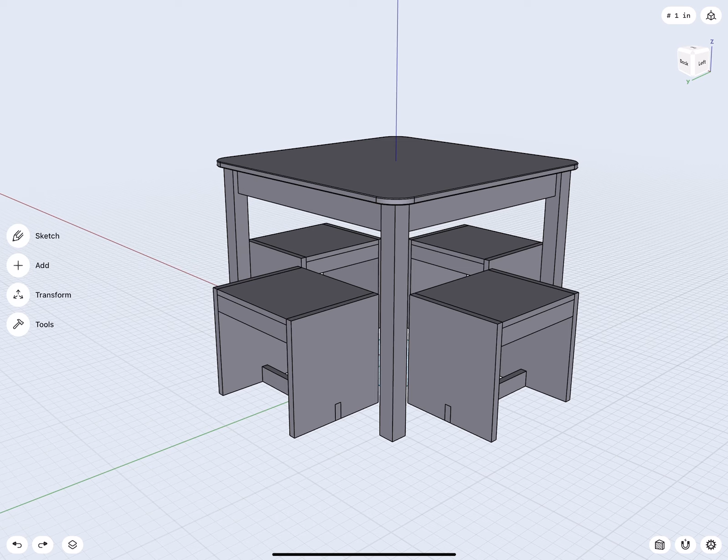Hello everybody, and welcome to this tutorial on how to model a toddler's table and bench set out of only one very basic square sketch, then doing the rest via Shapr3D's fantastic direct modeling tools.

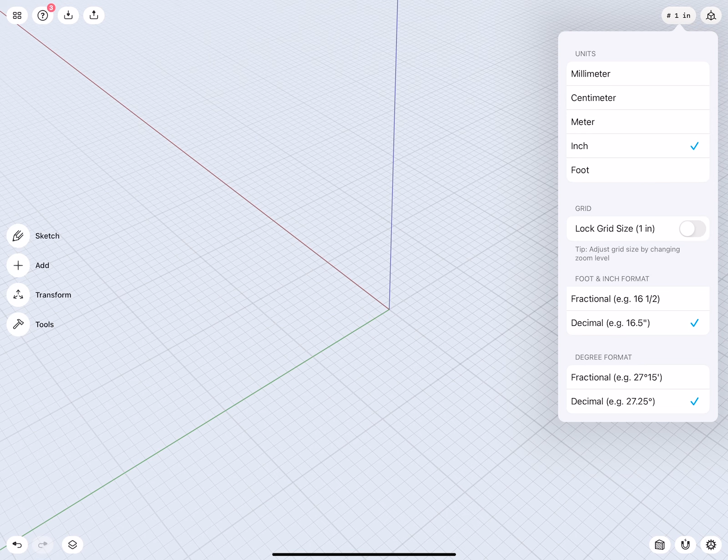We want to set units to inches. We will go into a top view, center the view, and make sure all our grid snapping elements are turned on. As I said, we will create everything just out of one basic square sketch.

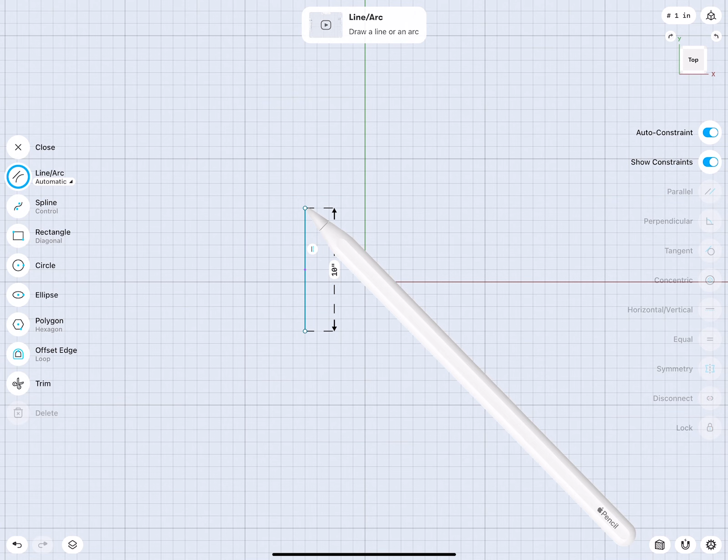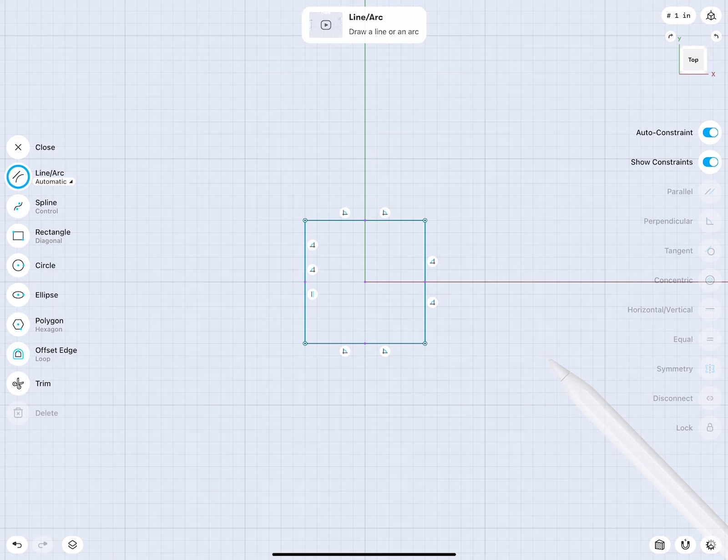So let's draw it. Somewhere here I draw my sketch, 10 inches by 10 inches. The square, however, I would like to be perfectly aligned, so I just move this down 1 inch. You see, drawing along the grids really makes a lot of sense - it makes it easy to perfectly center this square right in our design.

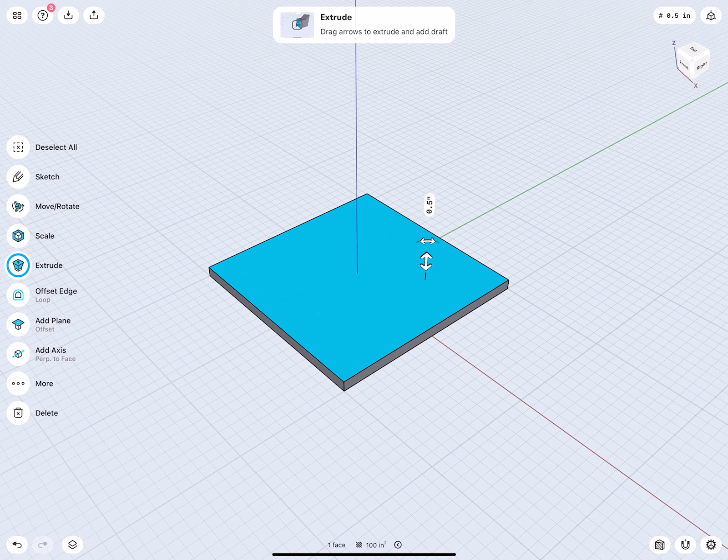Very good, let's create our first object. With the pencil, select the sketch, and then we extrude this one up by 0.5 inches. Double tap, and move this to somewhere - I don't know yet the height, we'll figure this out later. Very good, there's our top seating surface.

Now we have to design the sides, and as I said, just one sketch. Because now we have a cube, from this cube we can start modeling everything else. So let's make a copy.

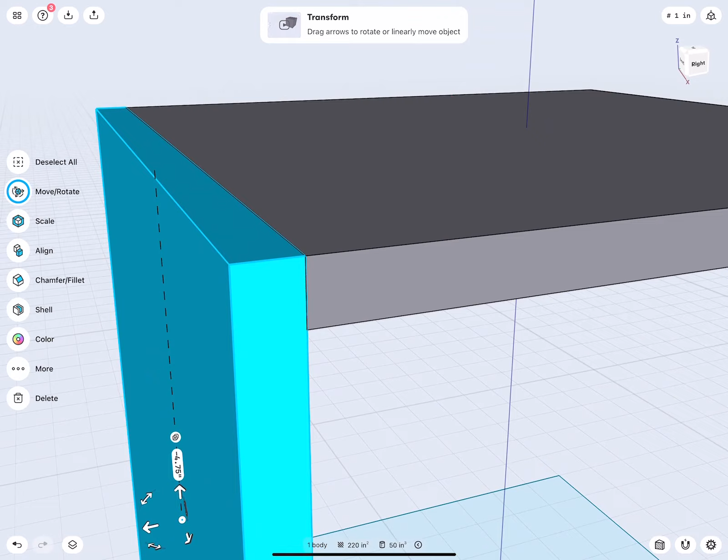So I clicked on copy, then we rotate this 90 degrees, turn copy off, move this over and move this down. Very nice, you see when the grid units work out, everything perfectly lines up.

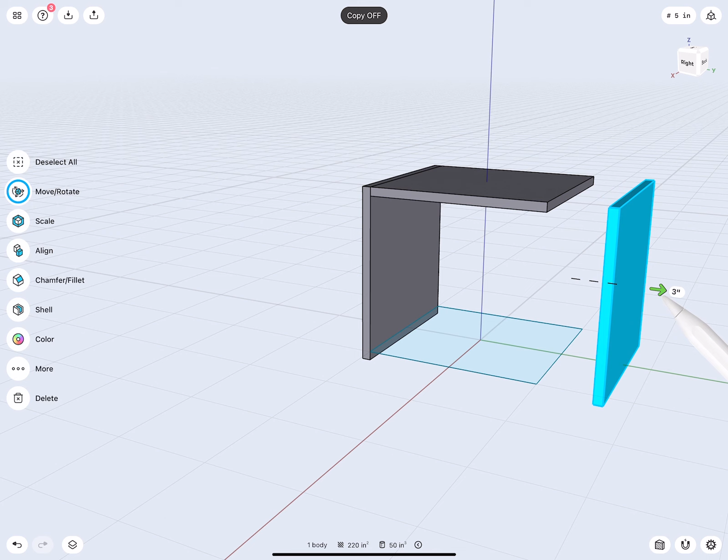I will double tap, click on make a copy, and then move this one over 10.5 inches. I turn this off and move this over to here, because I would like to show you something too.

So we could also, if we want to position this, there are two ways. The whole object is selected, then I can go to more, translate, and then I say, hey, this corner, snap to that corner. Perfect, cool, so nice.

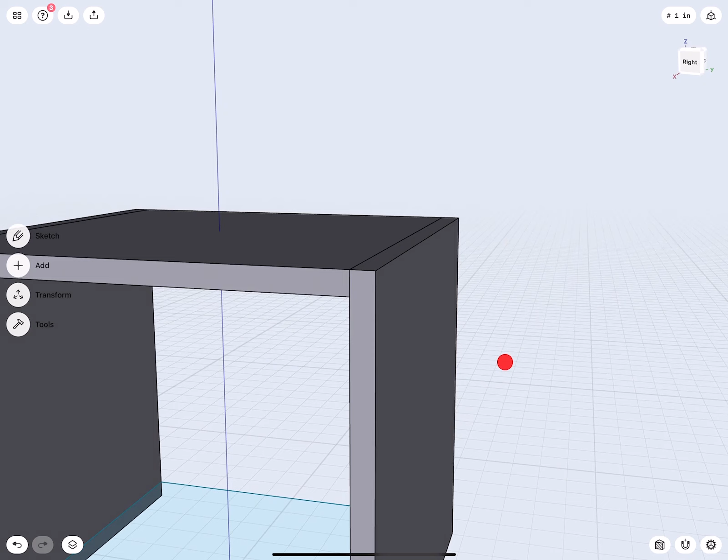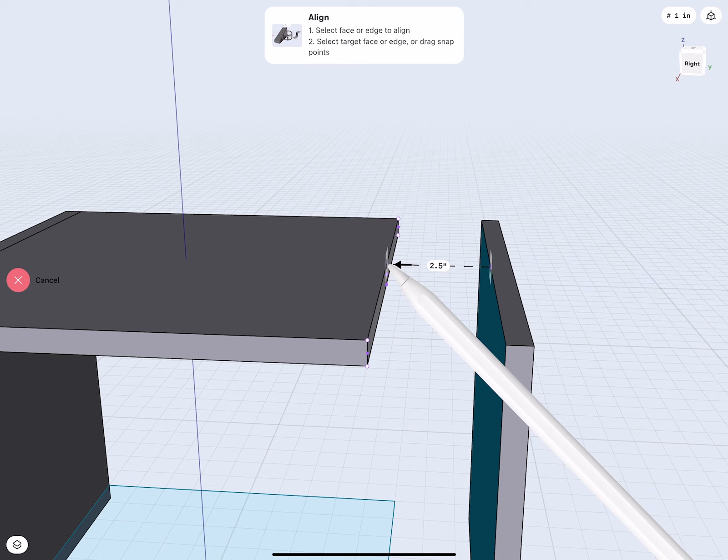Or I select the whole object, and then select the Align command. I would like to use this interface and snap here to this interface there, the top point there. Let's click cancel, and we'll zoom in a little bit more so you can better see what I'm doing. Select this face, then I go to align, and you see there's the corner point and the midpoint.

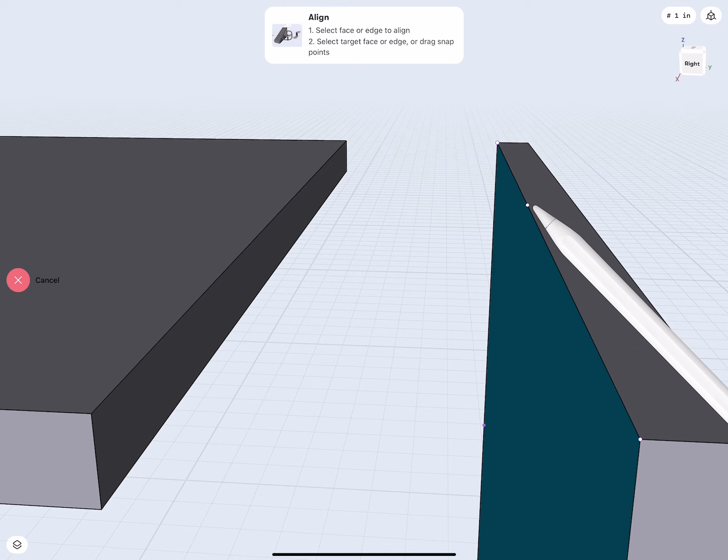So from the midpoint, I click more a little bit on the left side - if I click, sometimes you can actually rotate them. Then here you see how the target now rotates based on what face I'm on. And I want to align it to the midpoint up there. Ta-da! Super easy, done, very good.

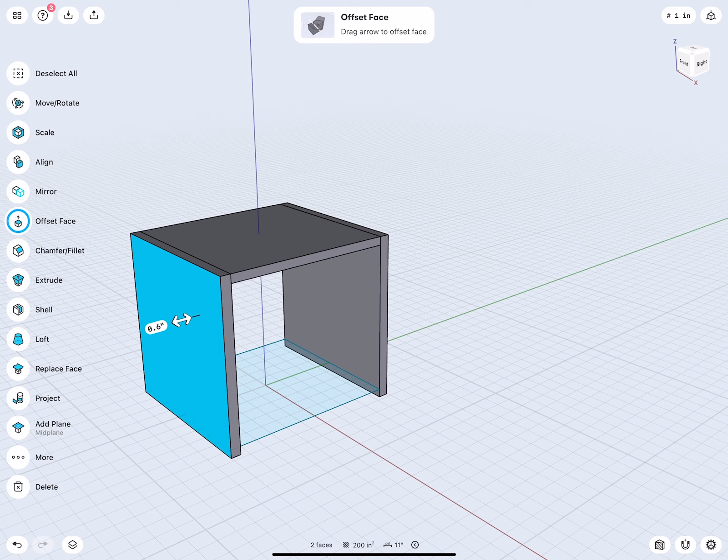Now, these two elements have to be actually not half an inch, but if I select the two faces outside, click on this, then I could actually enter a value - by 0.1, for example. Now it tells me each one is now 0.6 inch. If I select both faces again and then drag, then I get also a readout. Now with the readout, after I dragged, I can actually then type in the actual value I wanted to offset to.

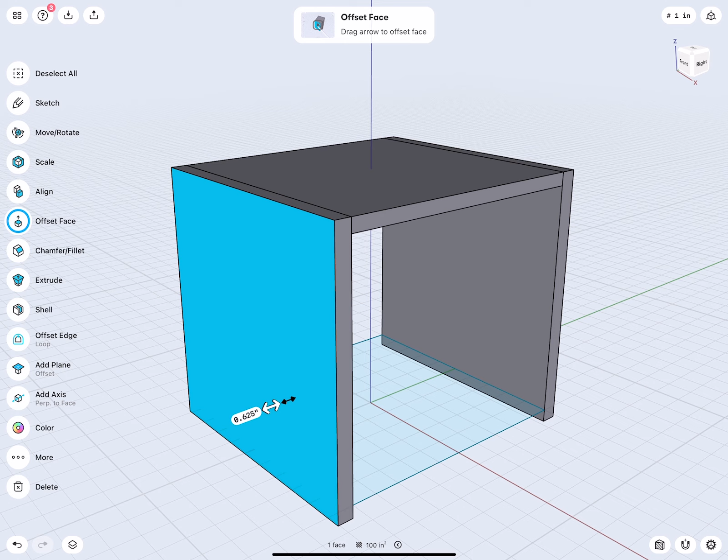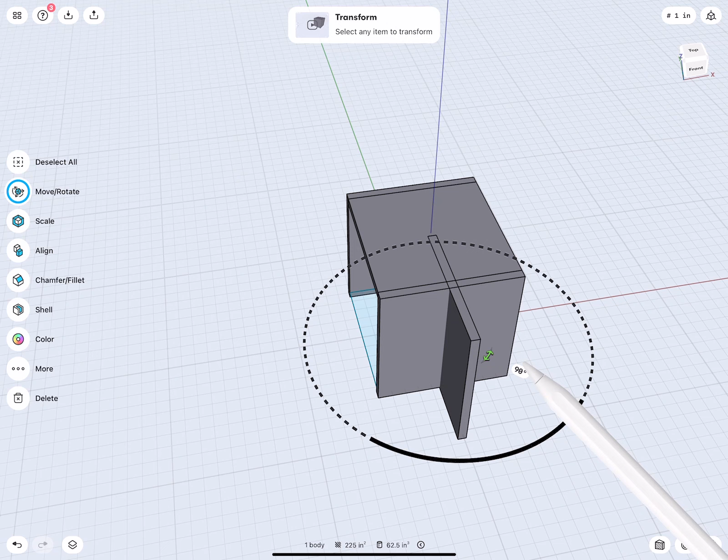Cool, very nice. So the whole thing needs a little bit more stability, so in the front and the back I need a small crossbar, the same at the bottom. We can use this one, make a copy, then I rotate this 90 degrees, turn copy off, move this to maybe here, a little bit there. Very good.

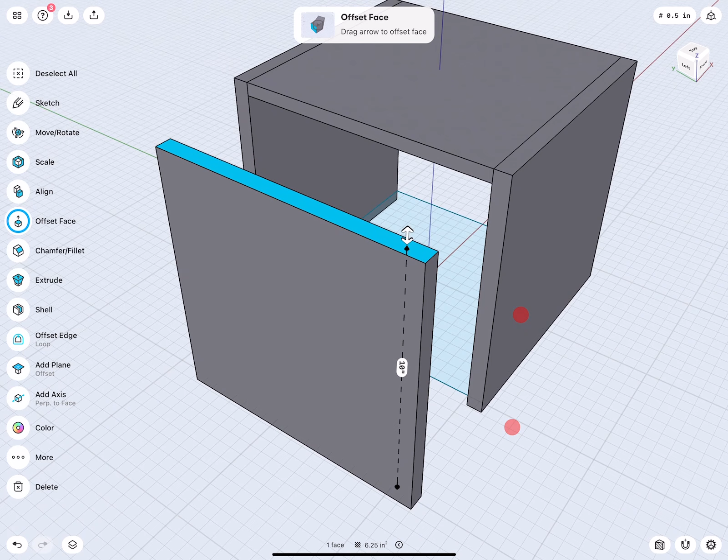So the height has to be 1.5 inches, so I select the top face. You see now it gives me a length readout and the ability to adjust it. Simply tap onto the dimension value, and then there we can set this to 1.5 inches.

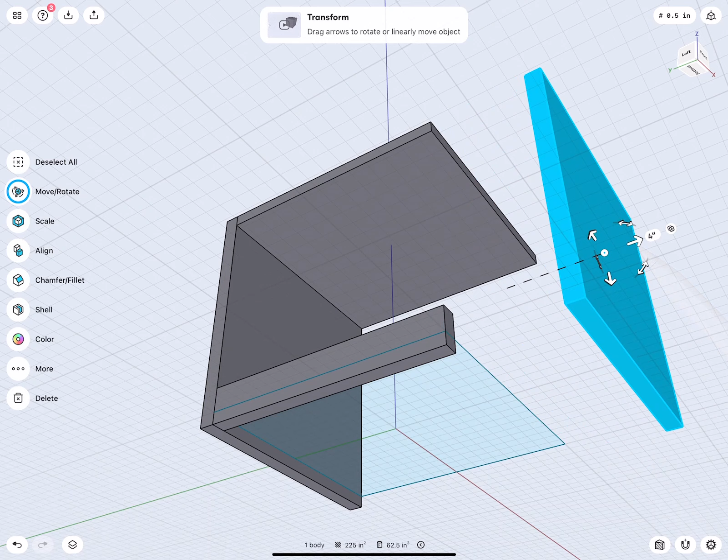Now this corner I would like to match up with there, and we know that's very easy - double tap, more, translate, and then drag from this corner to this corner, and done. When you drag two corners, however, be really careful that you drag them correctly and not a little bit next to it. Now I will move this a little bit on purpose - let's say this is a tick too short.

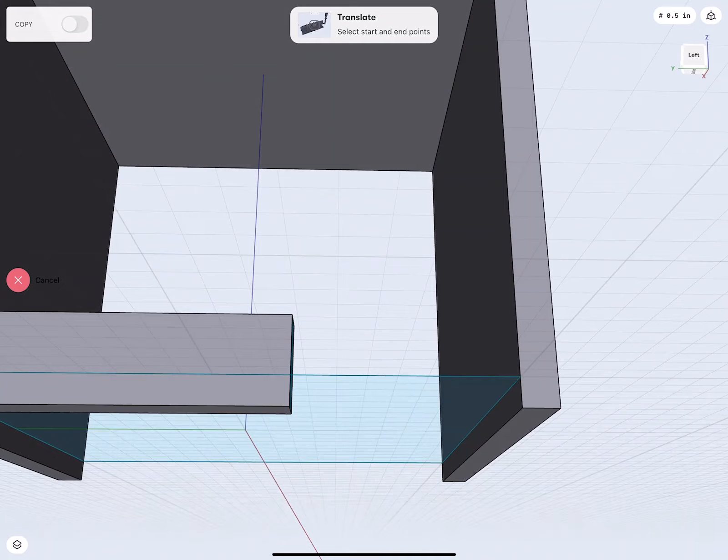How do we do this? Also here, two very simple ways. We can select this face, more, translate, and I go kind of like to this view and then say from here to there, move it.

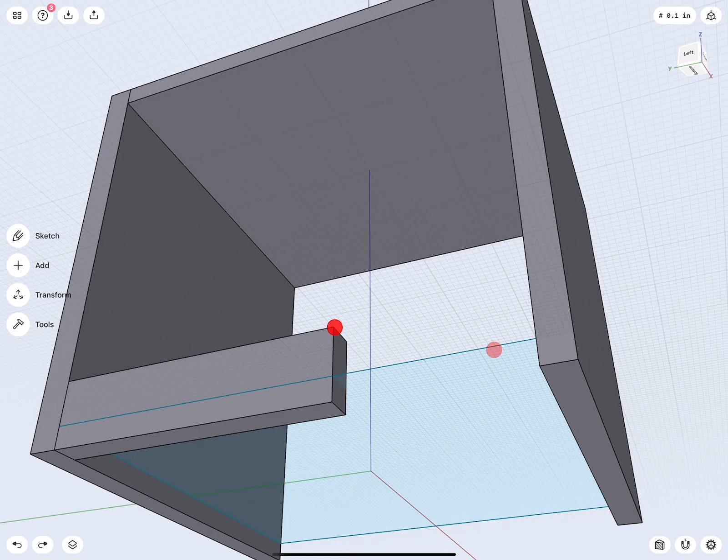Because this is a cube and direct modeling, it can only expand it or offset it along one path or vector - that's the reason why this aligned, even while actually my translate commands were more like a diagonal. The second command is when I selected this face and then this face on the left side, it's called replace face - so essentially now it's being folded onto it. Done, there we are, pretty cool.

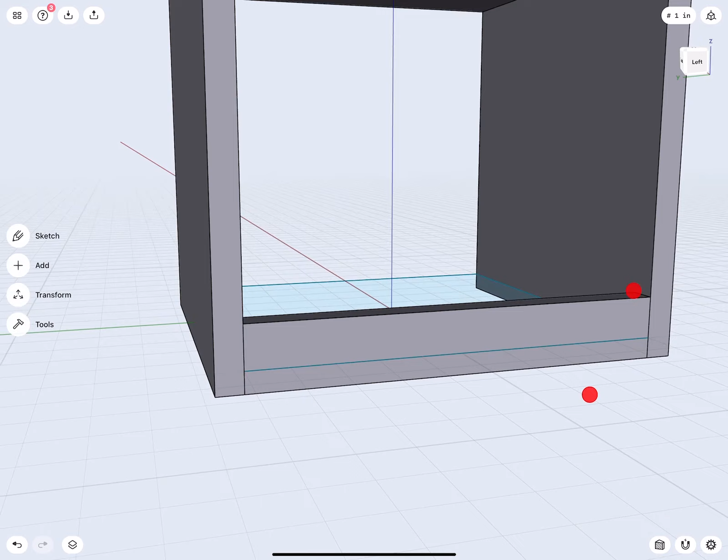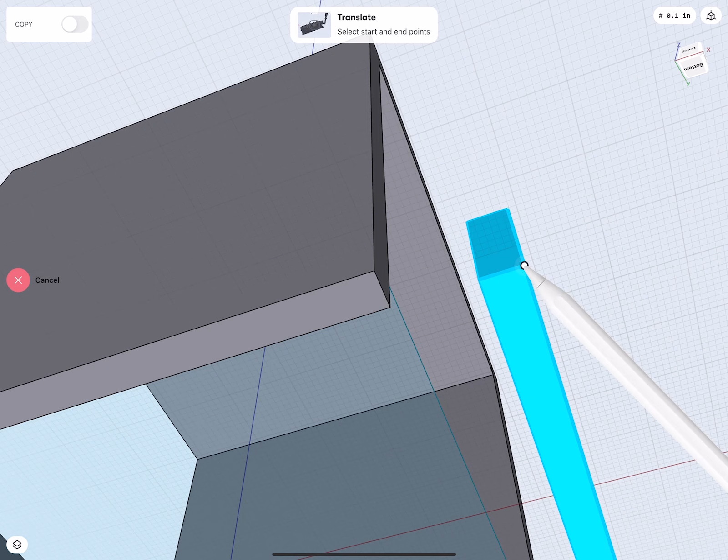Now from here, make a copy, zip, bring it to there. Does this line up? Maybe it can, but here's one tip: as good as the grid stuff always is, if you can, always try to work with the precision tools.

With inches it's not much of a problem, but when you work in millimeters, when you zoom out a little you might not see it, and when you zoom in really close you might see you're a little bit off. So both of those actually have to go up. I can select them again, translate from there, go to this edge. There we are. Very good, easy.

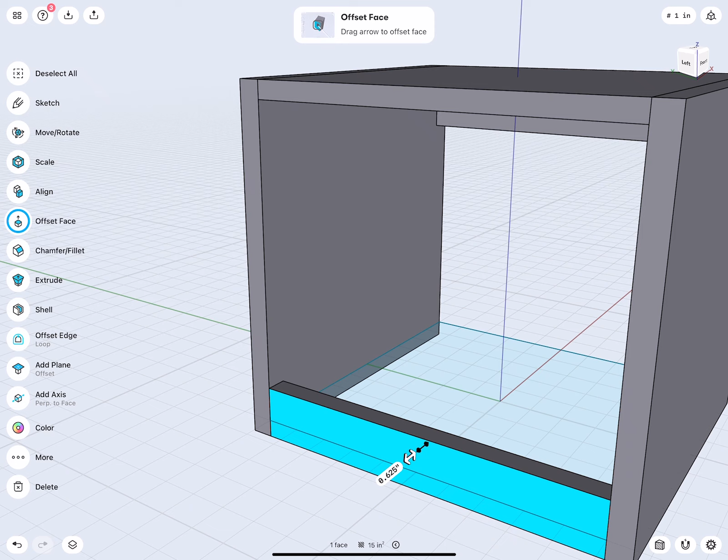Just to show you one more time how this can work when we also use the align command. So this time I will select this, align with there, and flip there, you see, beautiful. Here again, align - from the outside, drag up to the outside, and then we have to flip it. Done, very good.

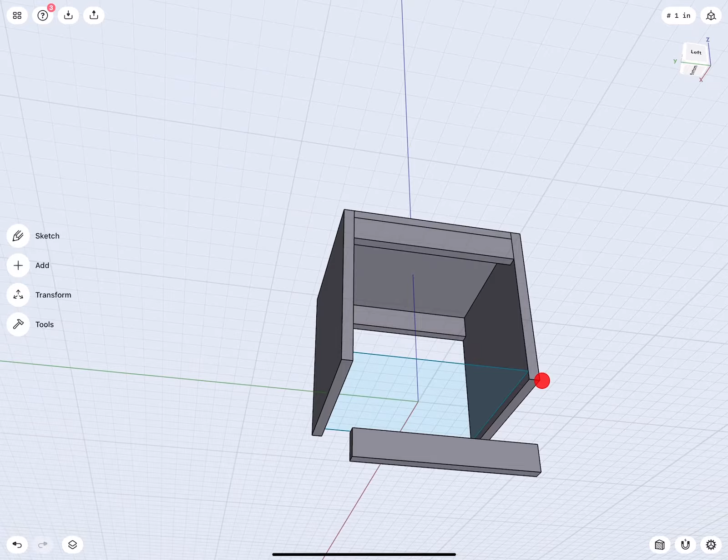Now one of those I need to be right at the center. So I make a copy, there we are. The sketch will be a little bit in my way, so I will hide it. And now I need to figure out a way how I could position this perfectly to there. So this face I see and this face I see, so that makes the align command very easy.

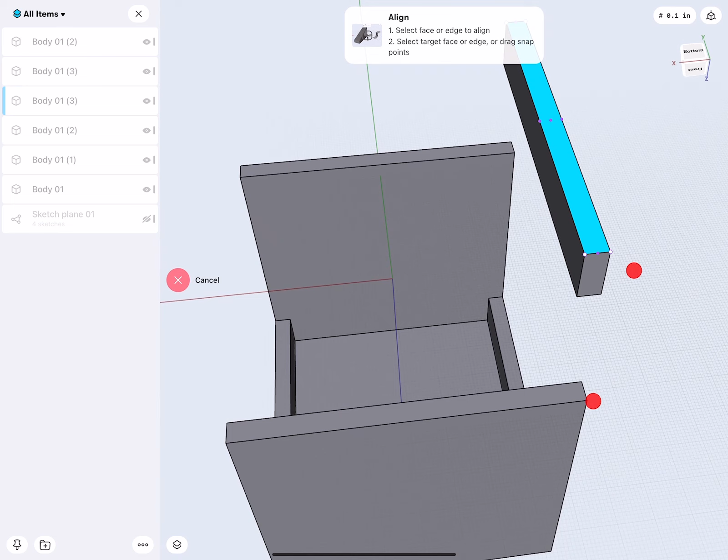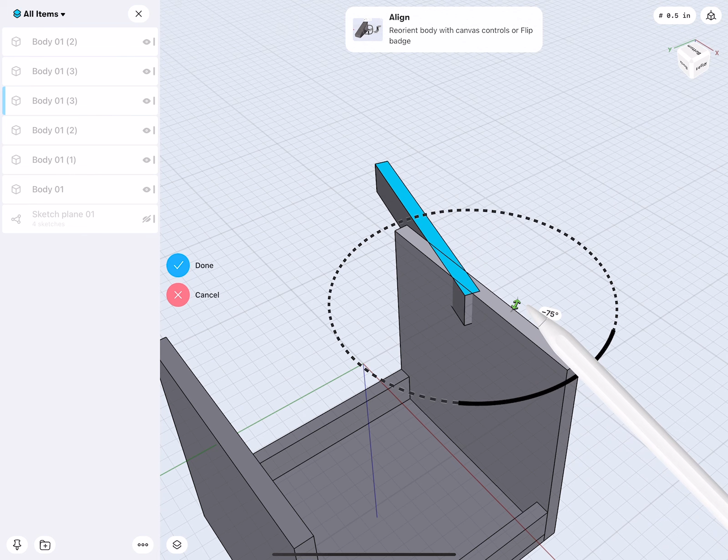So from here on top, go to here on top. Okay, now we flipped it this way, but we can rotate it. And actually the sweet thing is, you see even here when we do these rotations, it gives us more alignment commands. There, parallel, perfect. Cool, there's our bench.

Now I would like to actually have these crossbars at the bottom shine through here, so I want them to stick through. I will select these two faces, then I see which two objects I have there. Very good.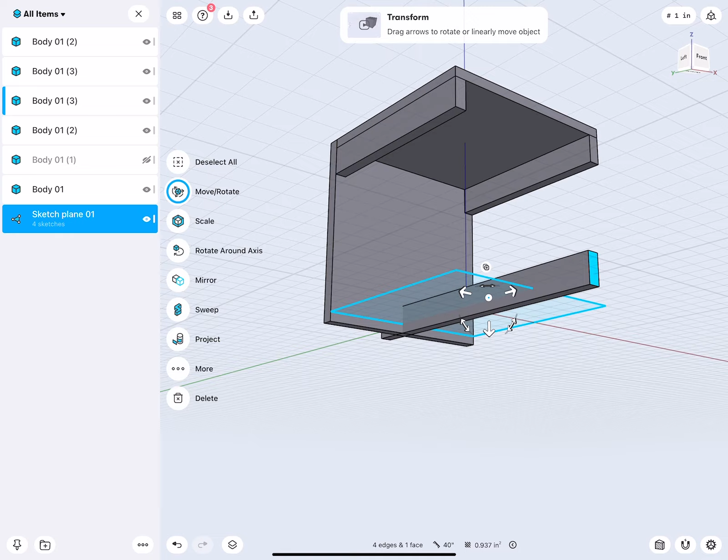That means now this I expand a little bit, same here. The two objects I can show again. So this face to this I will make flush again, same here.

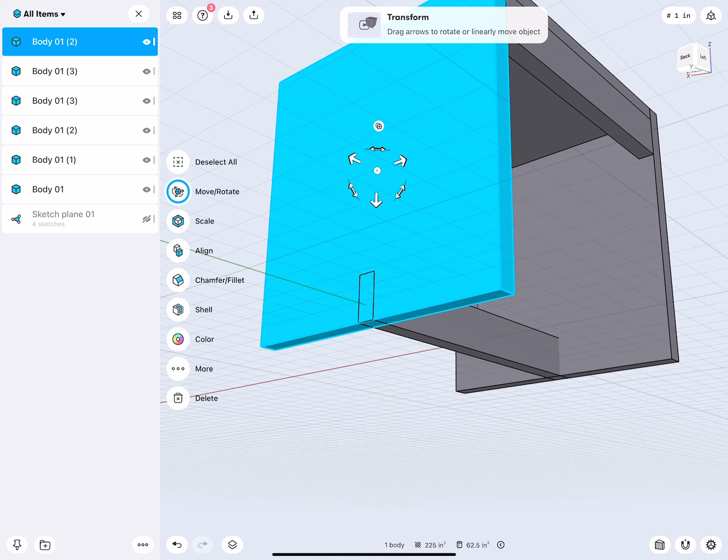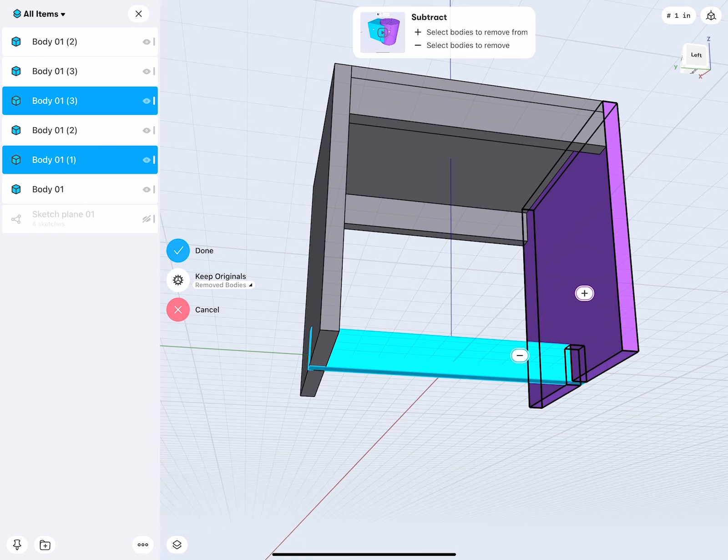There, cool. Now I need to cut out the space, so this object will get this one removed. Important: keep the removed bodies, because what this means is the removed bodies - that's the one with the minus on it, so the cyan one - that is the tool, or the body that will be removed from the magenta one, and we want to keep that one. Cool, there we are. Nice, no?

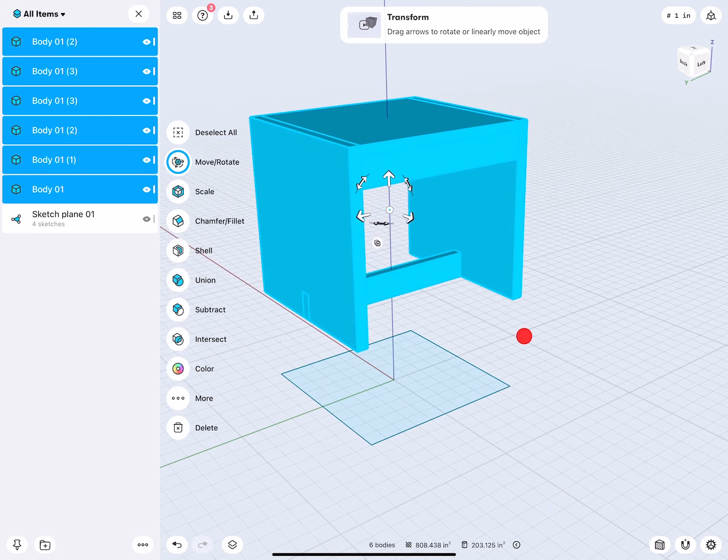Okay, I mentioned before in the first step we just moved it up to somewhere because I honestly don't know where it should be. I will select all this. Now I can go to, for example, the align command. But with so many, align doesn't necessarily work, so I can go with a translate command with all those selected. I could say, good, this corner, go to there. Very good, now you see it snaps perfectly onto it.

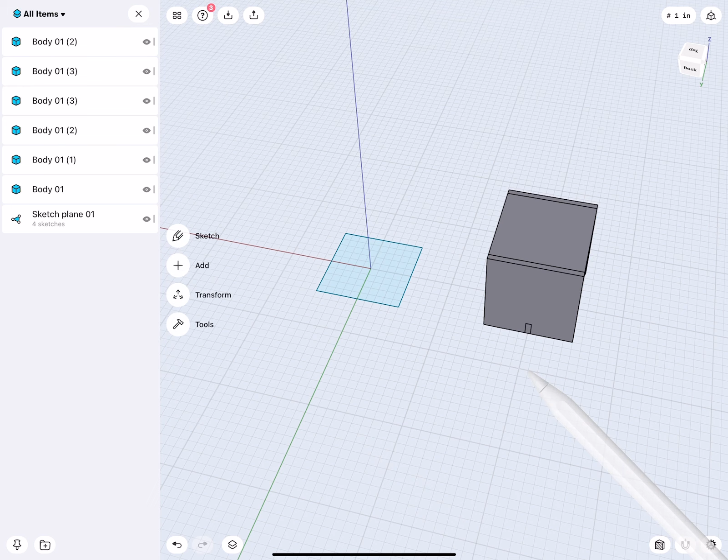So I grounded it and also positioned it correctly centered. Now I moved this nicely back by 20 inches, and all those I put into a new folder. Then select them and new folder, and we call this bench.

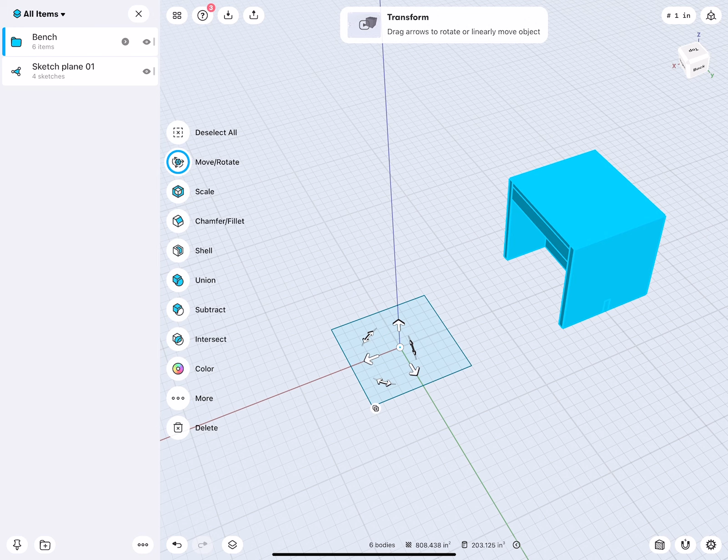With this rectangle, little tip: when we move the 3D widget onto the square center, you see it can snap to there. Turn copy on, have actually this folder selected, and there - it makes then a copy of the folder with all these objects inside. Then it's very easy to show and hide them.

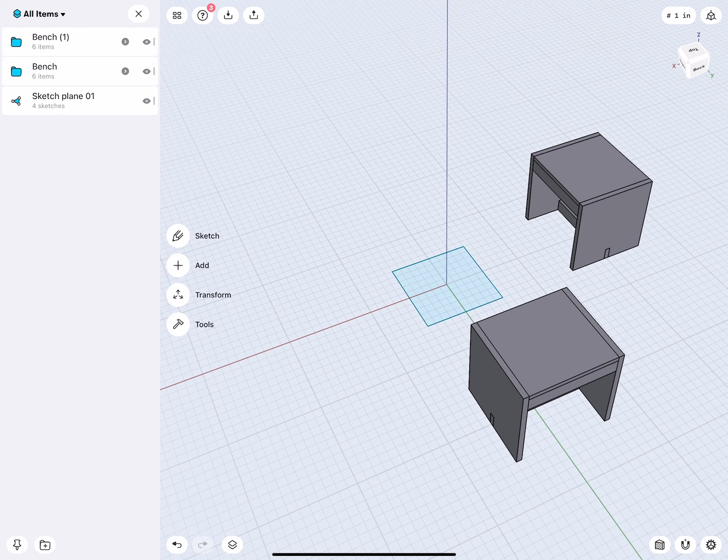Oh, pretty cool. So how do we do now the table? Pretty much very similar steps. And I hope at this point now you see how powerful actually direct modeling is, and we're only using one very basic sketch.

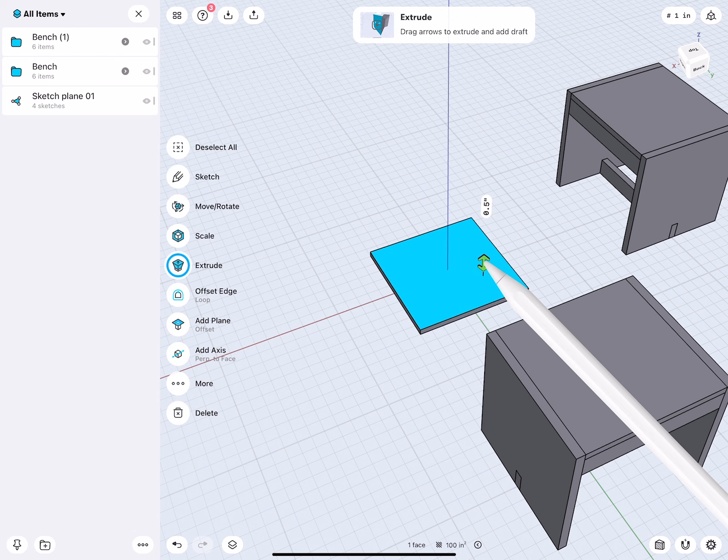Setting up sketches is really great, that can be very useful, but you can also sometimes lose a lot of time when you only focus on a sketch-driven modeling approach. So here we will create a tabletop.

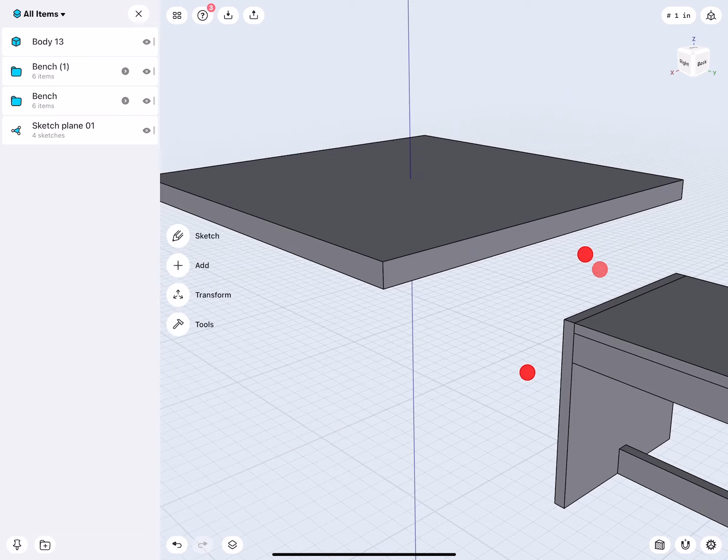1/2 inch extrude, double tap. The whole object we will move up by 19.25 inches. No, this is way too small, I need all 4 edges to expand. That's also cool - like when we have a rectangle, when we select all 4 edges, we can then shrink and expand all at the same time. And this should be 25.

Very good. Now at the end these corners are rounded - we don't do this yet. Let's work actually first on our legs.

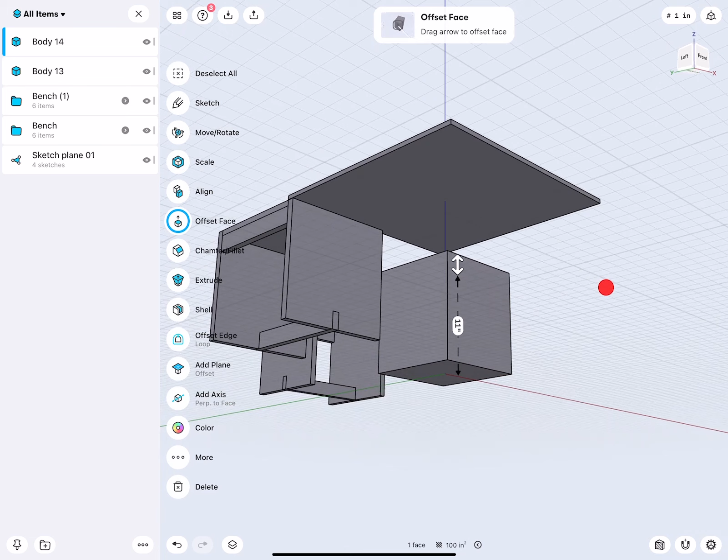Here we extrude this one up, very good, select this face. But you see then actually it stopped selecting this face. So after the extrude, tap somewhere else, tap the face, tap this, and replace face. I knew this was moved up by 19.25 inches, I could have memorized that, but by simply using the replace face command, it does it really precise.

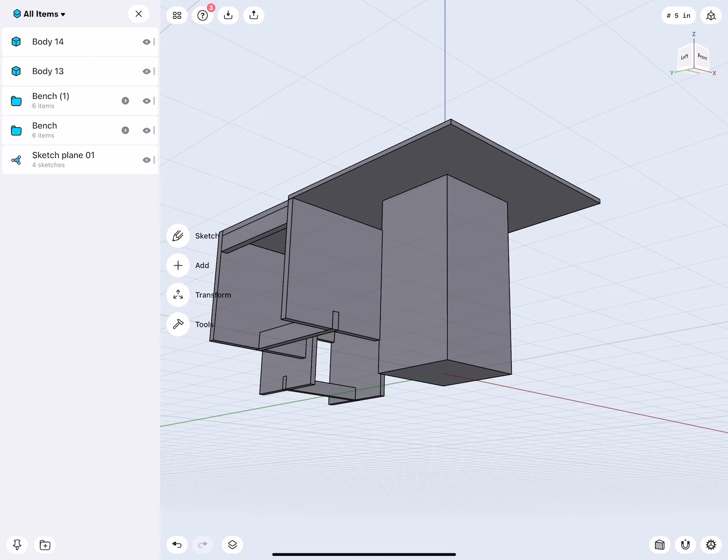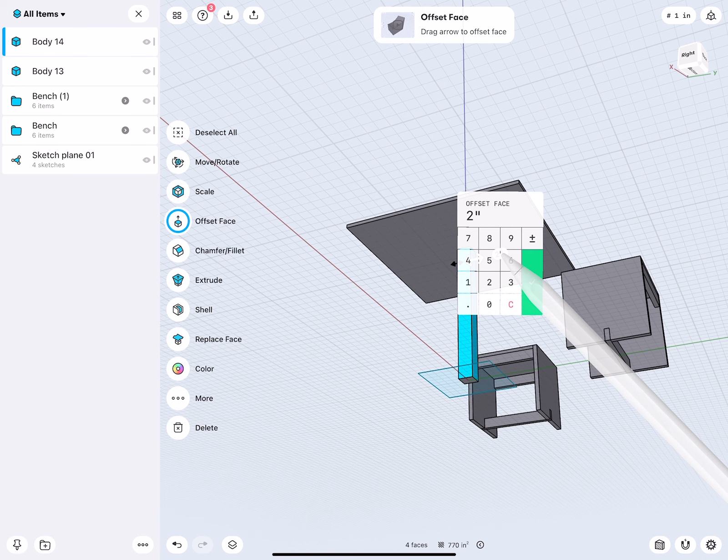So this actually releases a little bit of cognitive stress - just trusting your modeling tools instead of memorizing values all the time. The diameter is way too big, so let's shrink this one down to 1.5.

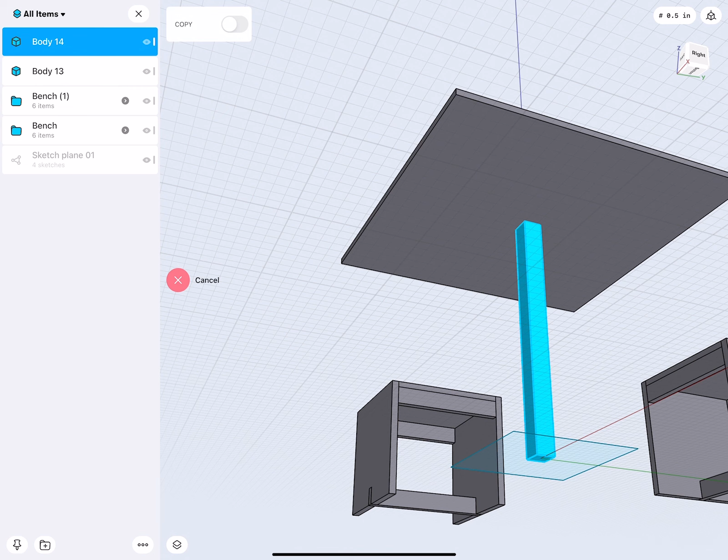Okay, very good. Now how do I position the legs so they're kind of like a little bit more inside? It's actually super easy - double tap, move, more, translate, and then we move this corner to there. And there we are. Double tap, and then we just simply move this in 1 inch and 1 inch. Super easy, okay, we have 4 of those.

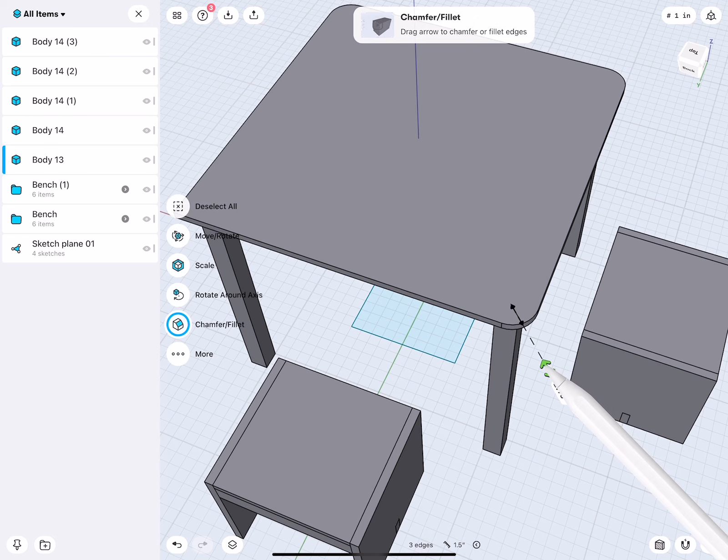Good, there's our rectangle. Copy on and rotate by 90, 180, and 270. Sweet, huh? You can see, easy. Now we can actually go ahead, select all those edges, and round it to 1.5 inches. Very good.

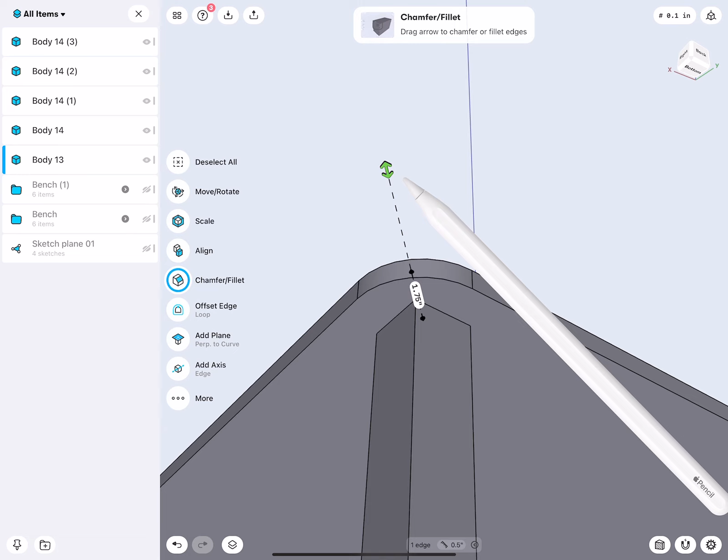The sketch I will hide now, and also this I will hide. Oh, one corner I forgot. Let's quickly round this one. There we are.

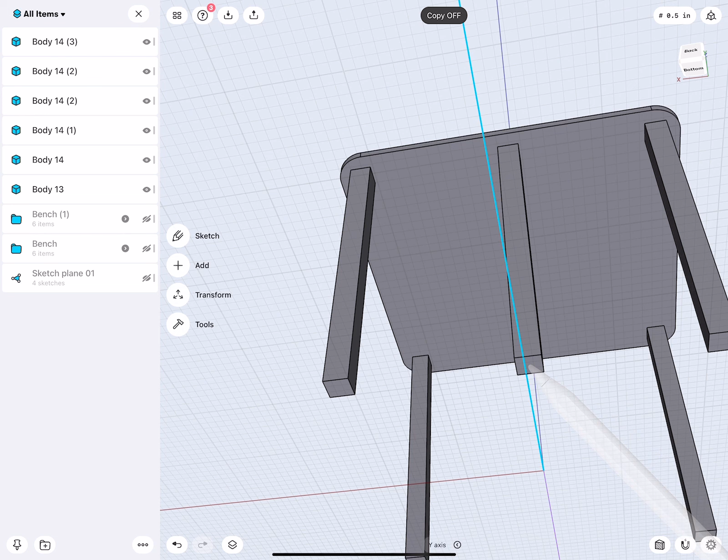So we need something to hold the table legs more together, otherwise they would very easily break off. Very easy: select a leg, copy, move this over, turn this off, go to the bottom face, and this is 2.5 inches tall, and the width, so this is actually 1.5. It should have a material thickness of 1 inch.

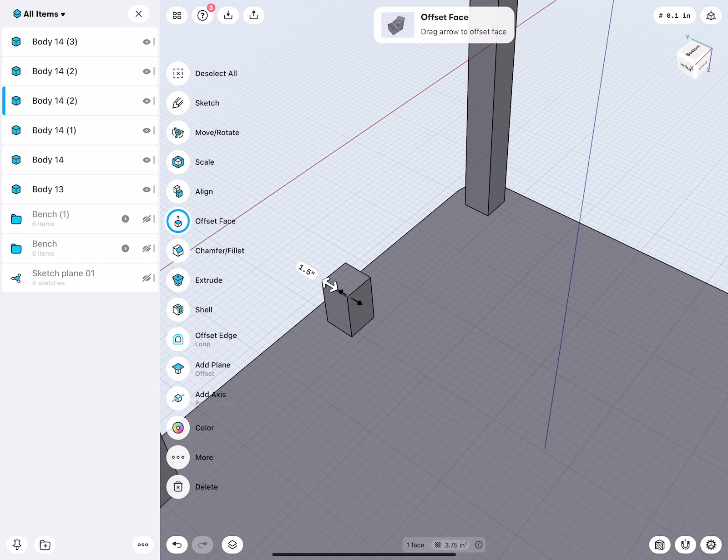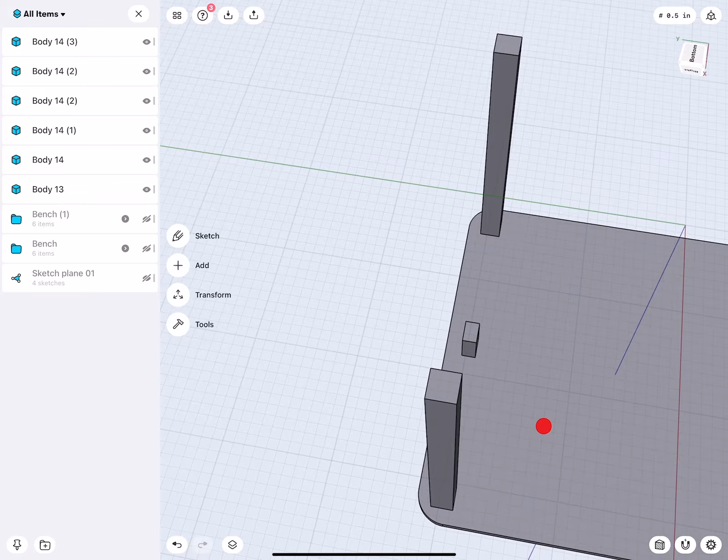So I know, okay, I can move this one over to 1.25, and then another 0.25 inches, and there we are. The reason why I did this left and right is now this rectangle is actually - there we go, show hidden edges - it's perfectly centered, you see? Okay, let's turn this off.

To make the distance correct, we simply use the replace face command. There we are.

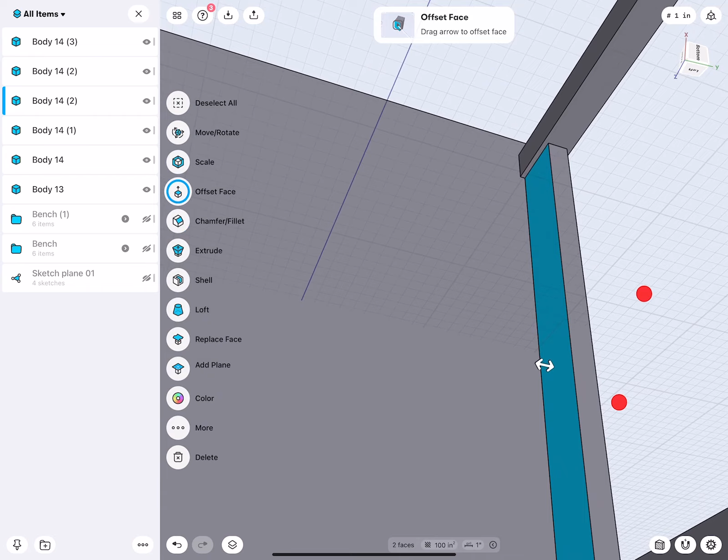And now in comparison, this is actually way too big, 1 inch. Half an inch will be fine. So I simply shrink it with each face, both faces at the same time, and you see the whole object remains being centered. Beautiful.

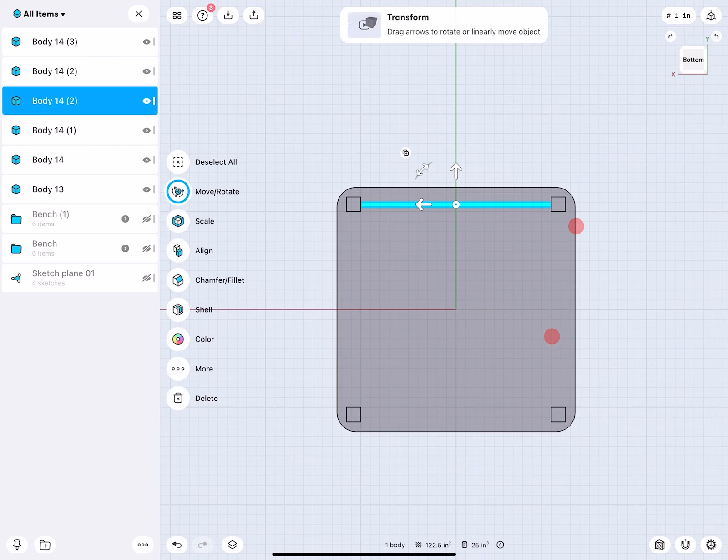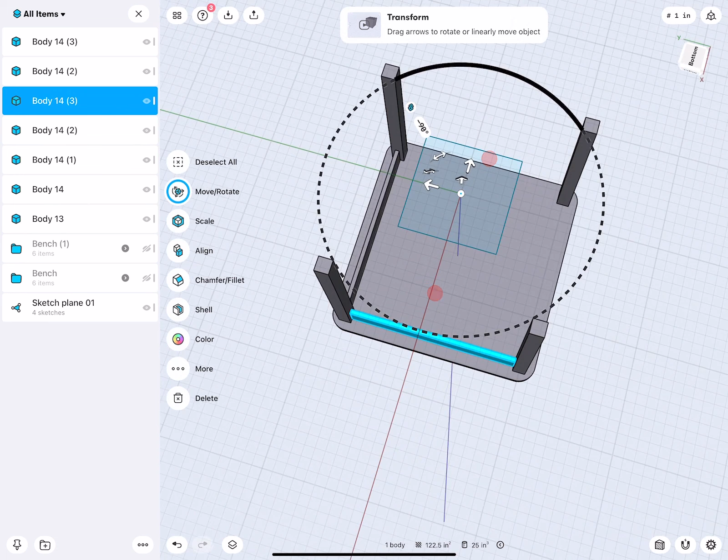I need to make a copy. So now I have nothing here to snap. That's the reason why I turn the grid on again. Sorry, this is the sketch, particularly in 3D view, as you saw, and then copy, and copy, rotate, and one last time. Very good.

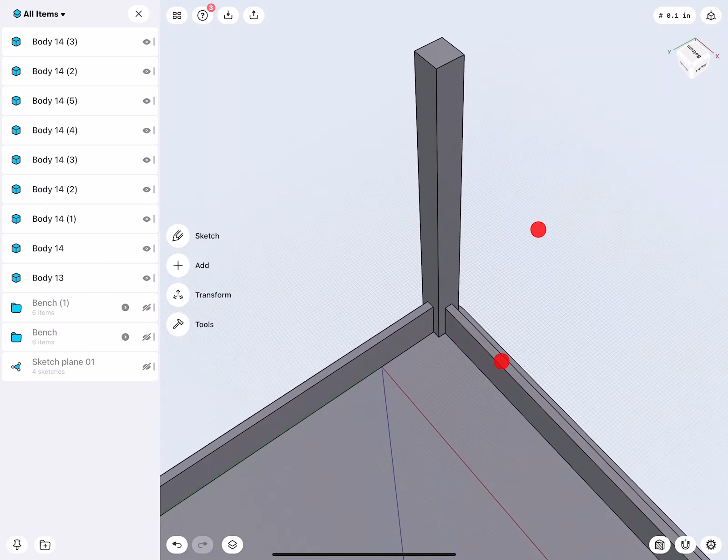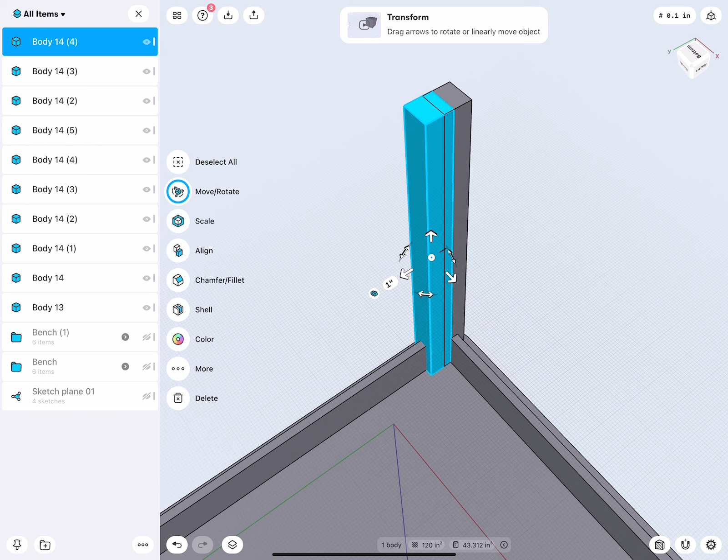So how do we do now a corner piece that's diagonal here? Let me show you first one that is very, very easy. So I will select this one and make a copy, and then I will move this one to here, stop the copy, and move this one to there.

Because again, now this is clean 1 inch steps, this perfectly lines up. Then this and this I will expand, so 3 inches. Okay, this could look good. Then this edge I will simply chamfer. There.

Now this one is a little bit in my way. Select and hide it. This should be 2.5. And then this corner now, I can chamfer.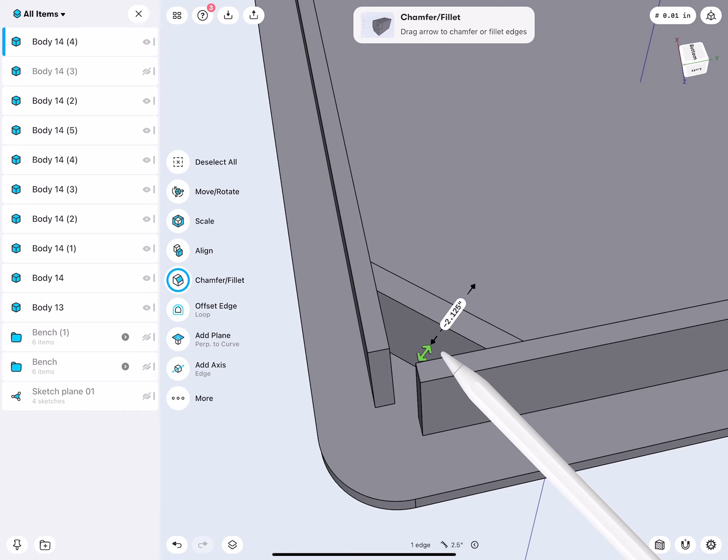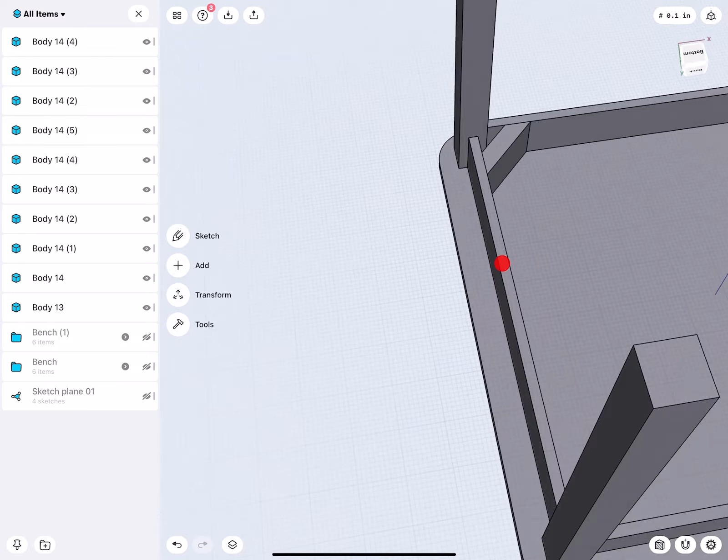Very nice. And I can select at one point this face, and then decide, well, this should be 1.5. This needs to be a strong piece, or 1 inch. Very good. Cool. So with this process, the sides perfectly line up.

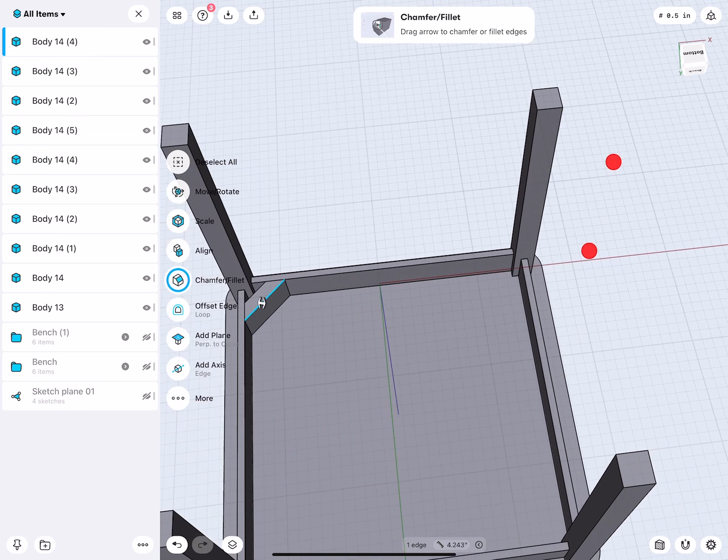What's the length? This is actually now 4.24, 4.25 something. Let's say we want this actually to be perfectly 4 inches, and we have to adjust our process a little bit. Let me show you how we can do that.

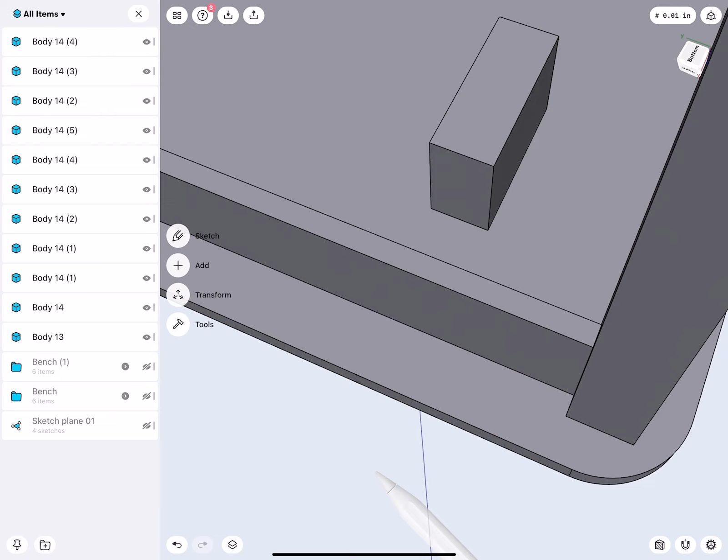I make a copy. Bring this over. This will be 2.5. This will be 4. So this is the outside face, this is the inside face. This one we can chamfer.

What's the material thickness? 1.5. I think we set 1 inch. Very good. You see, all that stuff can be adjusted later. 1 inch. Let's check. Okay, this is 4 inches, 2 inches. Very nice. So the whole object now we need to rotate 45 degrees.

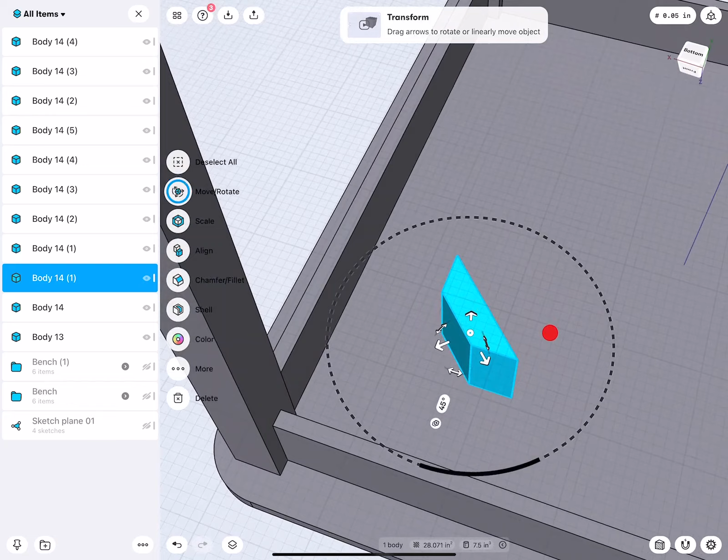And yeah, what do we do next? We need to somewhat align this. Well, we can bring this one in there and then there. Need to figure out how we could align the whole piece.

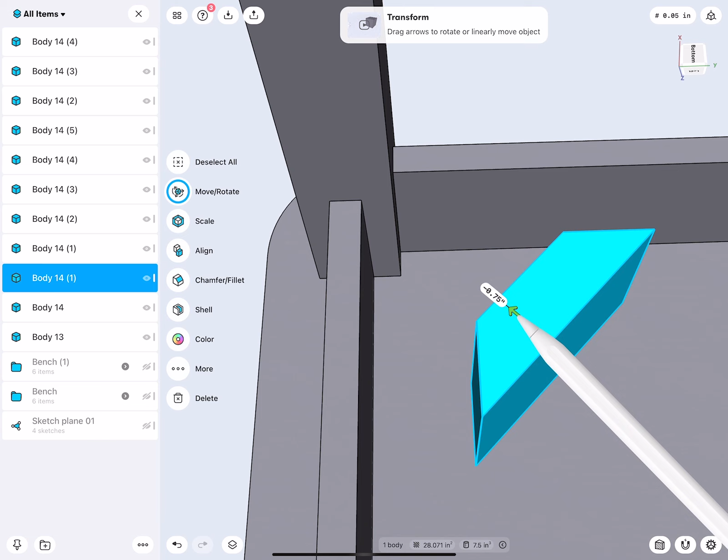I moved this on purpose to here because now we will use the translate command and then say, hey, from here to there to this edge, line this up. So at least this edge is clean.

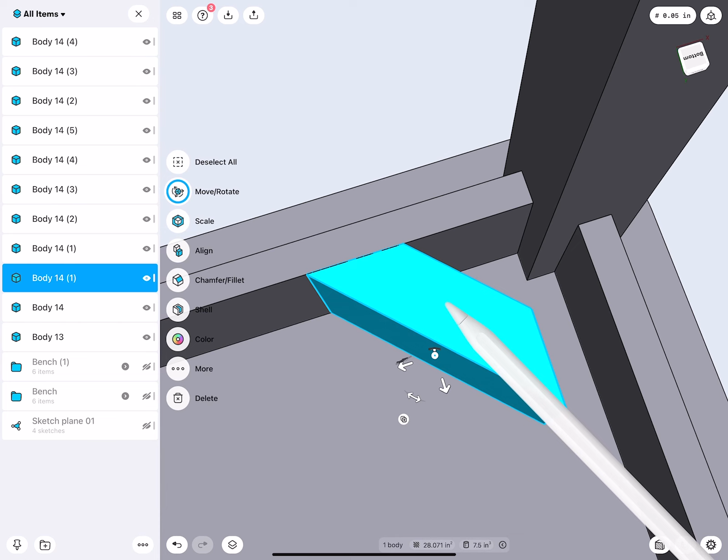Then I can select this one. Be careful with how you move the 3D widget. I want this to be on this edge because you see how it rotates. Very good. And now very careful, I just have to rotate to there.

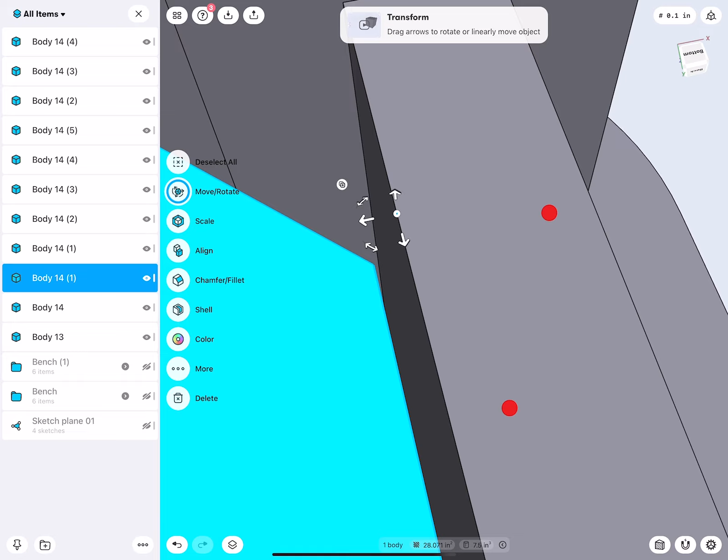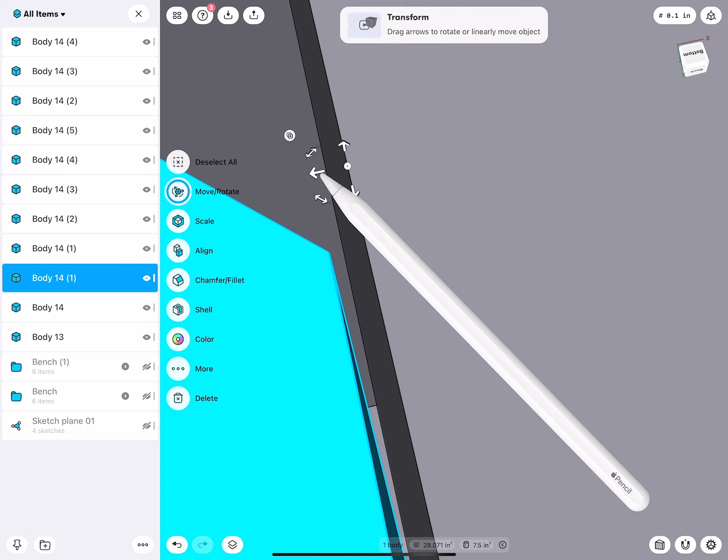To make things a little bit easier, I simply move my 3D widget more into my view and then continue dragging it, and the more I zoom in, the finer the grid gets. So this is maybe a little bit less of a precise process.

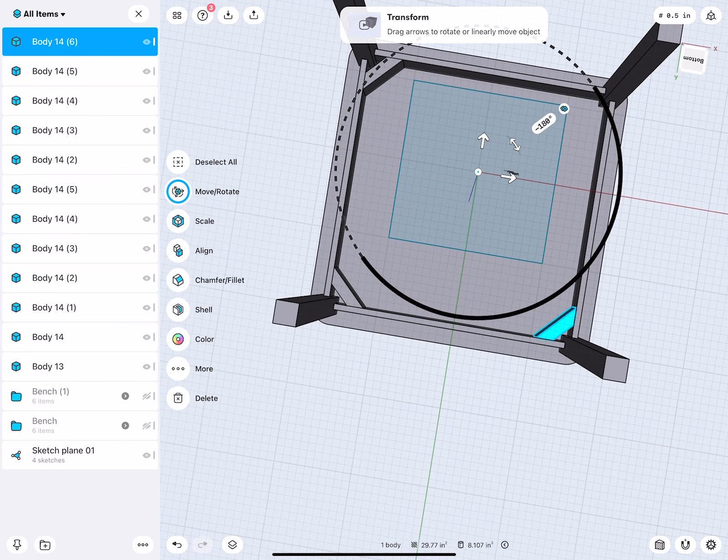Okay, and then based on which object you would like, I will remove this one. I will select this one. I need my sketch one more time. Copy and rotate, rotate, and last rotate. Beautiful.

Then select all those into a folder. Call this table.

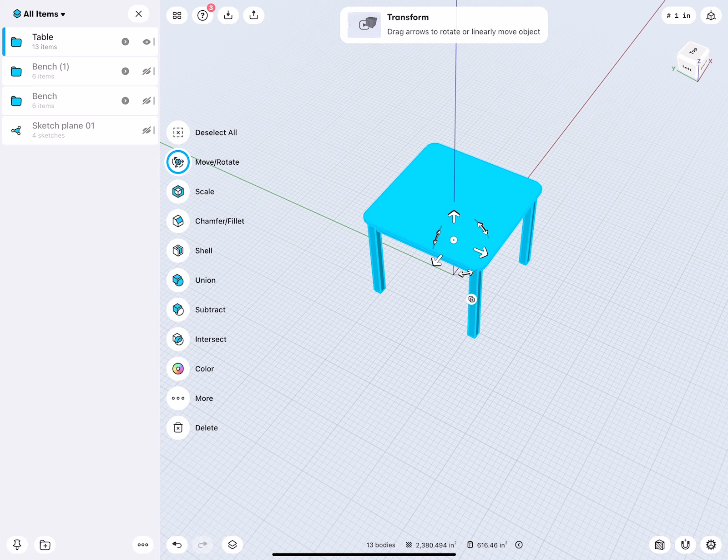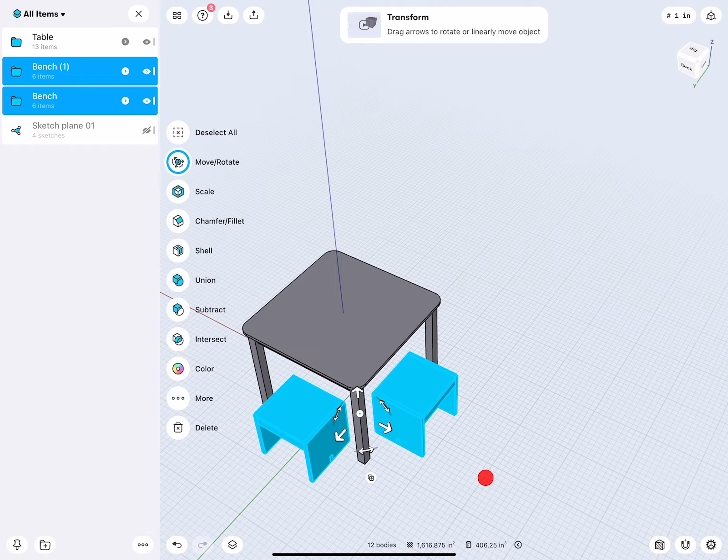Very nice. So does this all look pretty good? Let's maybe select a folder that selects all the parts, move this in by 6 inches, deselect it, select the other one, move this in by 6 inches, select both folders, turn on the sketch, move the widget, turn on copy, and 180. And there we are. Pretty cool, huh?

So I hope that this exercise kind of showed you the power of a modeling process that is not too heavily relying on sketches, but rather embraces the flexibility of direct modeling to adjust the geometry and to translate the geometry.